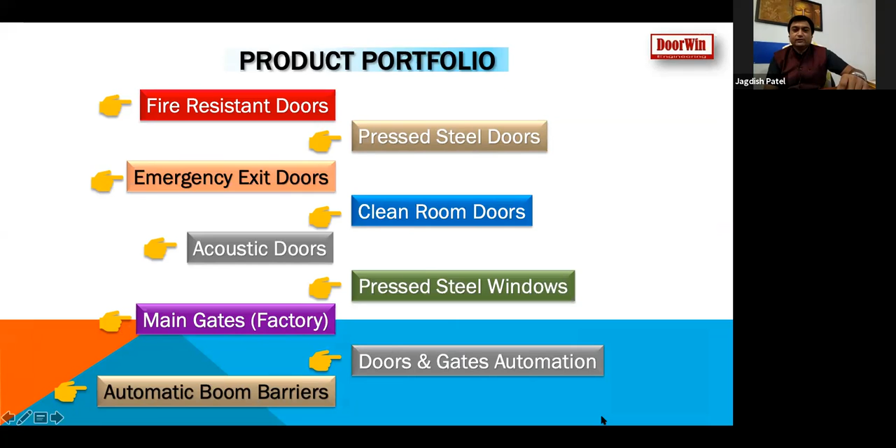Our product portfolio has fire-resistant doors, pressed steel doors, emergency exit doors, clean room doors, acoustic doors, pressed steel windows, main gates for factories as well as bungalows, doors and gate automation, and boom barriers. Next, please.

First, we will look at the fire-resistant doors. Fire-resistant doors are doors which have fire resistance. They can withstand up to 1100 degrees centigrade for up to 2 hours. The fire resistance is measured in terms of integrity, stability, and insulation of the door. Meaning if the inside temperature of a room is 1100 degrees centigrade, then the outside temperature of the door should not exceed 200 degrees centigrade.

Basically, all our doors have a similar internal structure, but the thickness of sheet, door thickness, and insulation material varies. The scope of the door: this kind of door can be used in factory buildings, warehouses, stores, godowns, electrical control rooms, shafts, kitchens of hotels and factories, entrances and exits of factories and commercial buildings. Next, please.

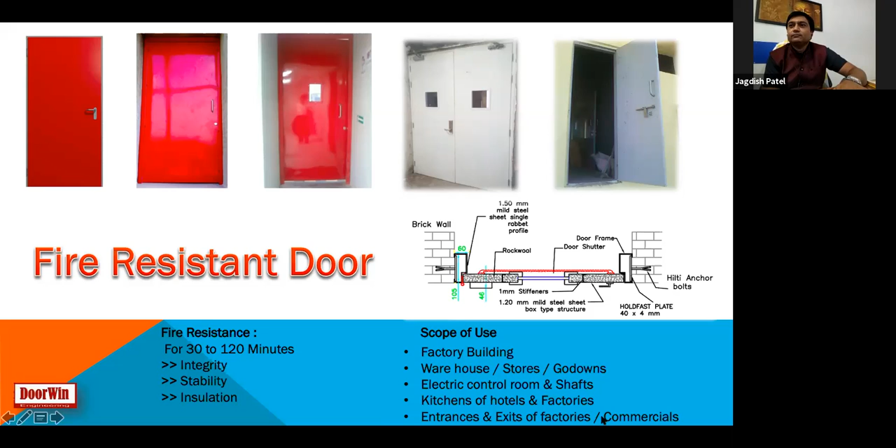The next type of door is the emergency exit door. This kind of door has optional features like fire resistance. It can be a clean room application, airtight, waterproof, or soundproof door. And this door has special provision for escape in emergencies. The door is provided with panic exit devices.

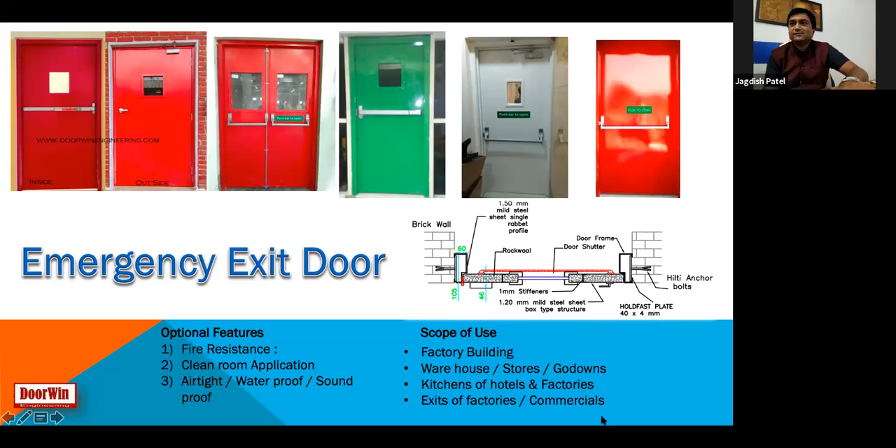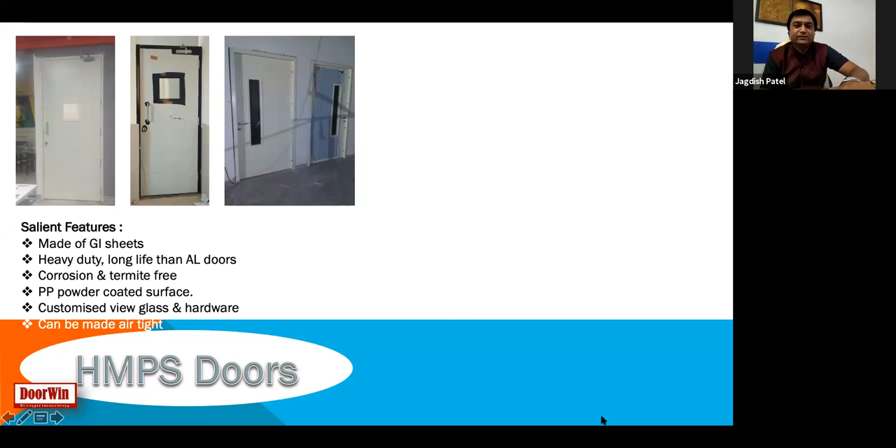HMPS door. The HMPS door is a general purpose door, again made of GI, SS or MS sheets. The salient features are heavy duty, long lived, and corrosion free and termite free. So this kind of door is nowadays used as a replacement for aluminum and wooden doors. Pure polyester powder coated surfaces are provided. Customized view glass and hardware is provided with the doors. And it can be made airtight or waterproof. So this kind of door is used where you need a long lasting door.

Next is the clean room door. Clean room doors are also a special kind of HMPS door. They are made of GI or SS304 sheets. It is dust free, germ free, and corrosion resistant. Customized view glass with double glazing is available, so that glass is provided on both sides. The door has a completely flush surface, and there are no surfaces where dust or germs can accumulate. High quality SS or brass hardware fittings are provided.

It is airtight from all four sides: rubber sealing on all three sides of the frame, and at the bottom, an automatic drop bottom seal is provided. So from all four sides it is airtight, and no dust or germs can penetrate inside the room. The surface finish available is SS matte or PP powder coated. So this kind of door can be used in pharma, hospitals, as well as the food industries. Next, please.

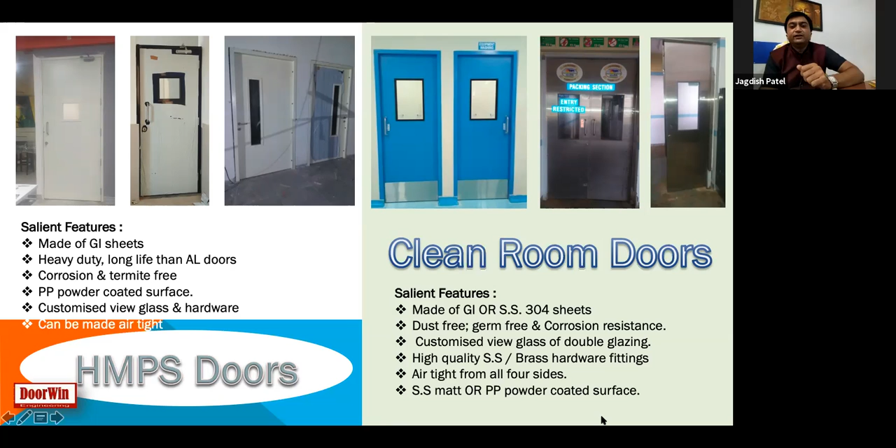The doors are provided with high quality SS304 or brass hardware like hinges, deadlock, sash lock, door handles, door closures, fire or acoustic seals, automatic drop bottom seals, panic exit devices of various kinds, and trim locks. You can see all this in the pictures. Next, please.

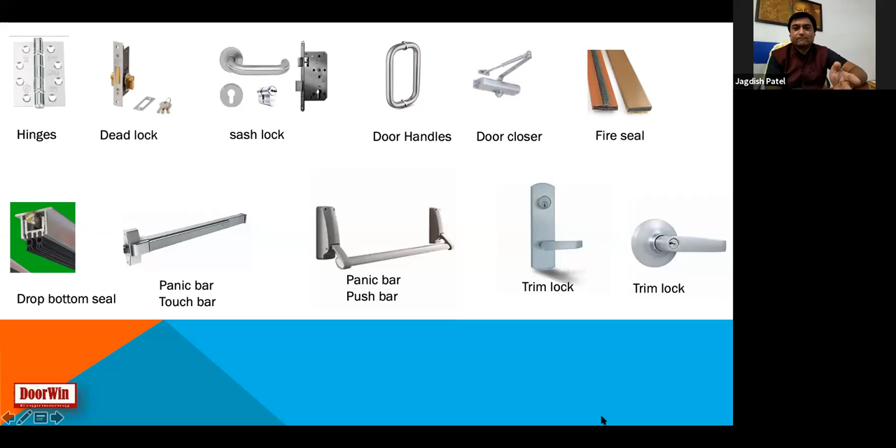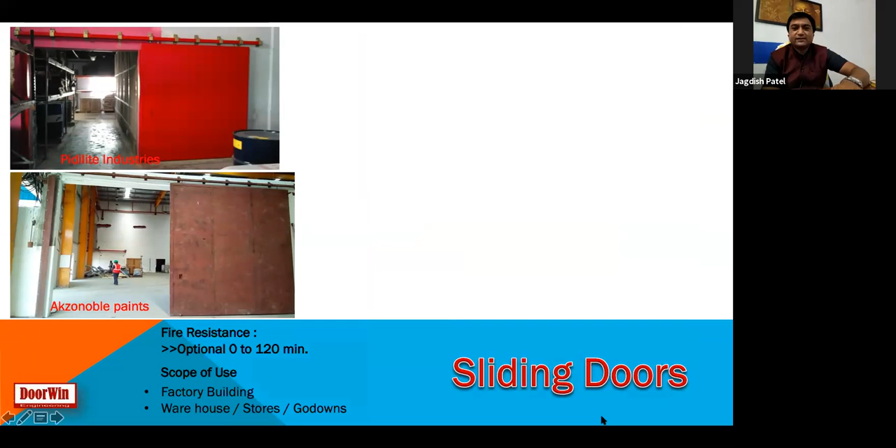Sliding type fire doors. These are automatic sliding type fire doors. In case of fire, it will sense the fire inside or outside the room, and it will automatically close the door. So in case of fire, you don't need to worry. Your goods are safe inside or outside of the factory. Next, please.

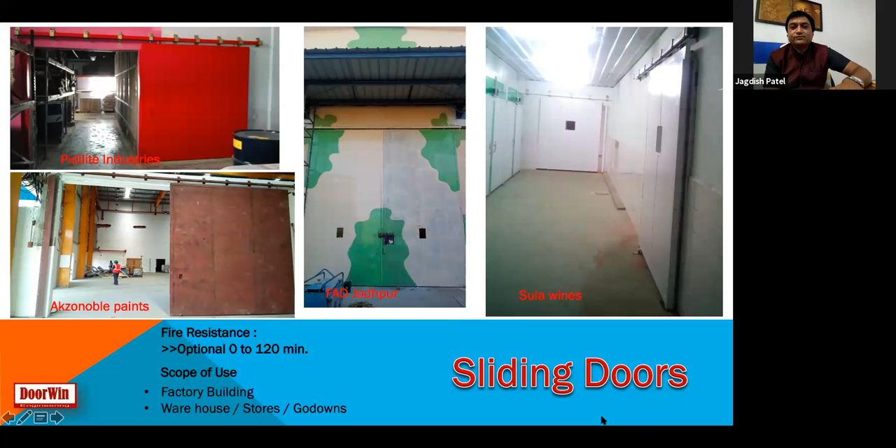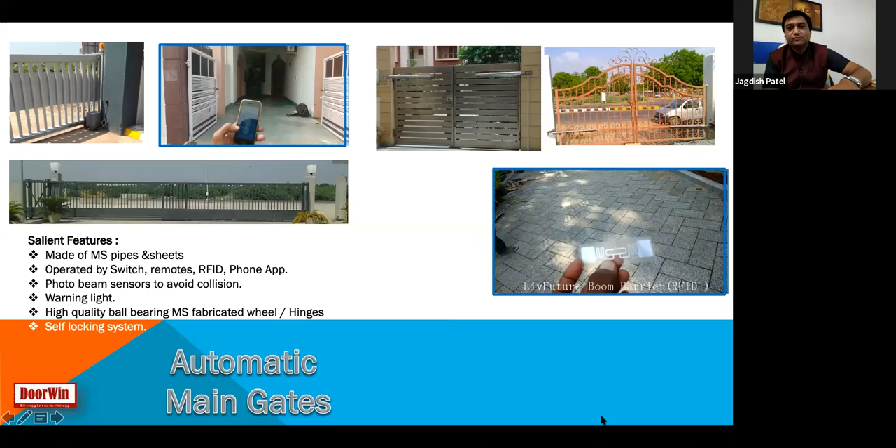Next product is the automatic main gates. We manufacture as well as do the automation of main gates of sliding type as well as swing type. These gates can be for factories, bungalows, or commercial projects. If you look at the salient features, it is made of MS pipes and sheets, operated with a switch, remote, RFID or phone application. Photo beam sensors are provided so that accidents can be avoided. Warning lights are there, and high quality MS ball bearing rollers are used for better performance. Next, please.

Boom barriers. We have almost all seen boom barriers on commercial exits as well as highways. Boom barriers are an automatic kind that can be operated with an RFID system, remote, or switches. Next.

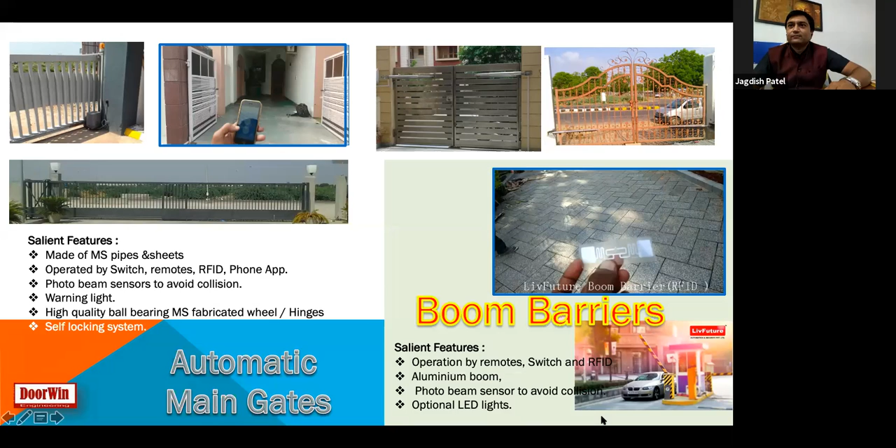Now we will see some of our special designs. This is the first design we did for the Philips Vadodara unit. The first image shows the louvered door. The store located inside the factory needed to have ventilation. For that, we made a completely louvered door. And the next is the sliding up door to eject the waste from the trolley. They needed sliding up doors, operated with a sensor. Next.

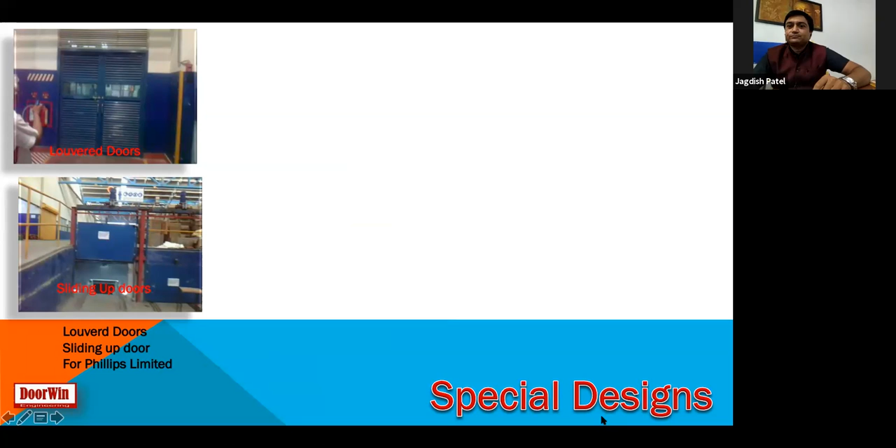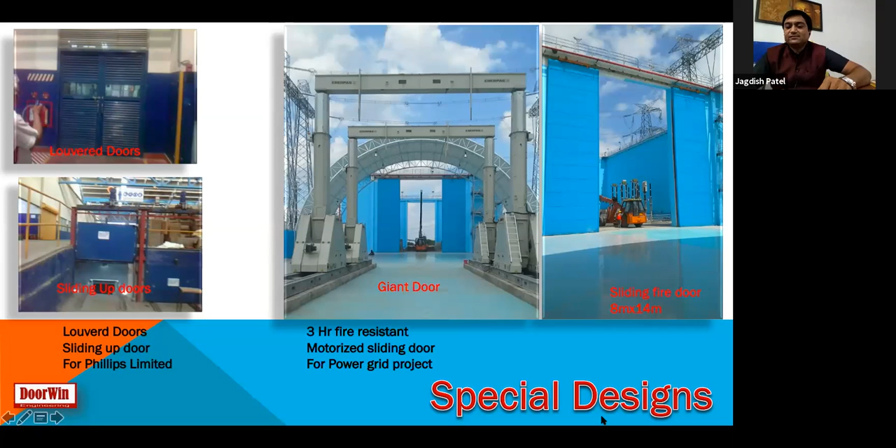This is a kind of giant door we manufactured. It is a 3-hour fire resistant door, and the size is 8 meters width and 14 meters height. That is a very giant door that was made for the Power Grid project. Very big transformers are supposed to be tested in this lab. Next is a 66 feet long automatic sliding gate. This was the gate we manufactured for Ford in Sanand.

Next is a video. Please play the video. It is a kind of telescopic gate. It has two leaves. One leaf rests behind the other. Here the bottleneck is to design the operation for the other leaf. One leaf is operated with a motor, and the other needs a mechanism to be operated. And that should be in such a way that it gives double speed to the other leaf. This was made for one factory in Sanand. Next, please.

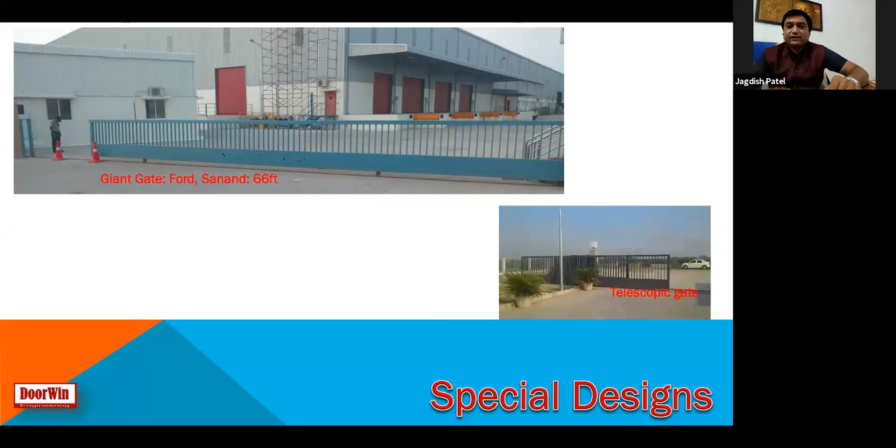This is an automatic sliding roof. In Guru Krupa bungalows behind the Karnavati Club, they had an opening in the center of the house for ventilation and sunlight. But they had the problem that in rainy season, rain also came from that opening. So they wanted a transparent automatic sliding roof. That was designed, manufactured and successfully installed by us. Next, please.

1 minute left, Jagdish bhai. Next, please.

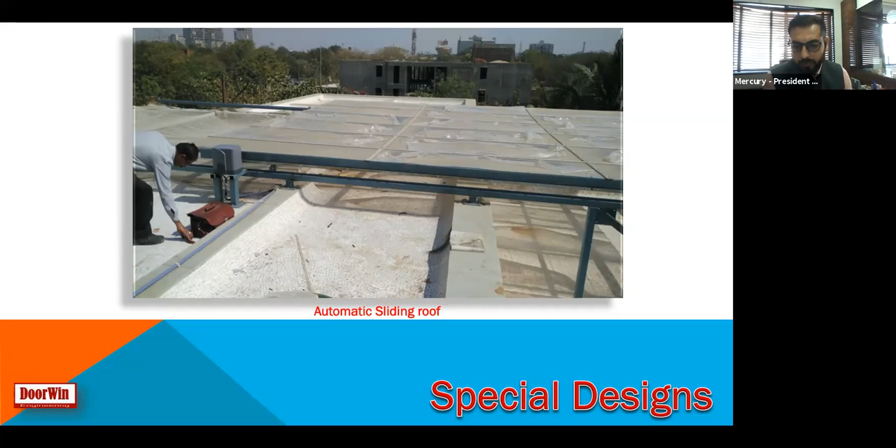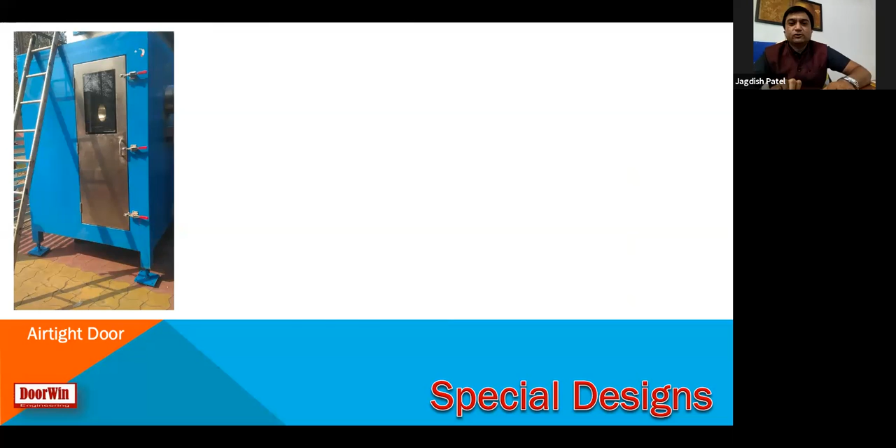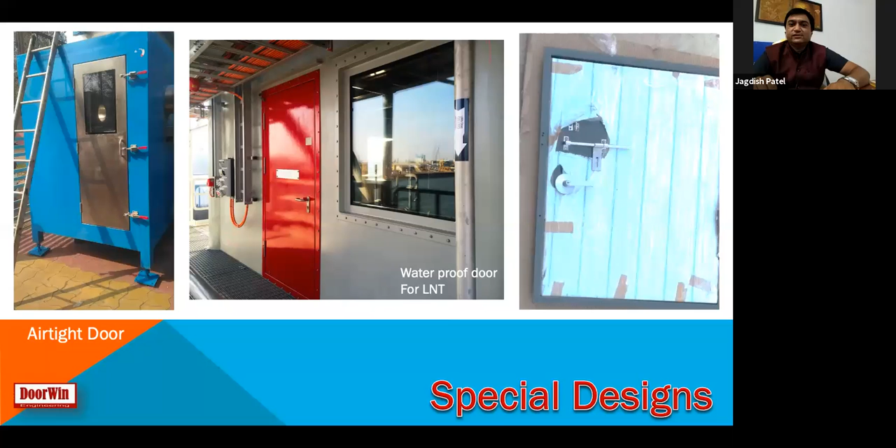Another is a waterproof door designed and manufactured by us for an L&T project. L&T was supposed to make one container and supply it to Germany, and for that the door was designed and manufactured by us. These are some images of that. Next, please. These are the fully glazed fire resistant door and fully glazed fire resistant partition designed and manufactured for the HPCL Bhachau site. Next.

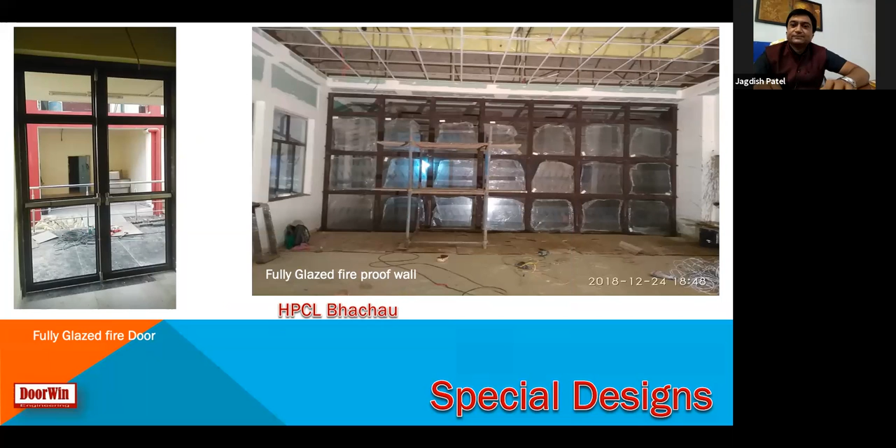Jagdish bhai, time is up. Jagdish bhai, just the last slide, quickly.